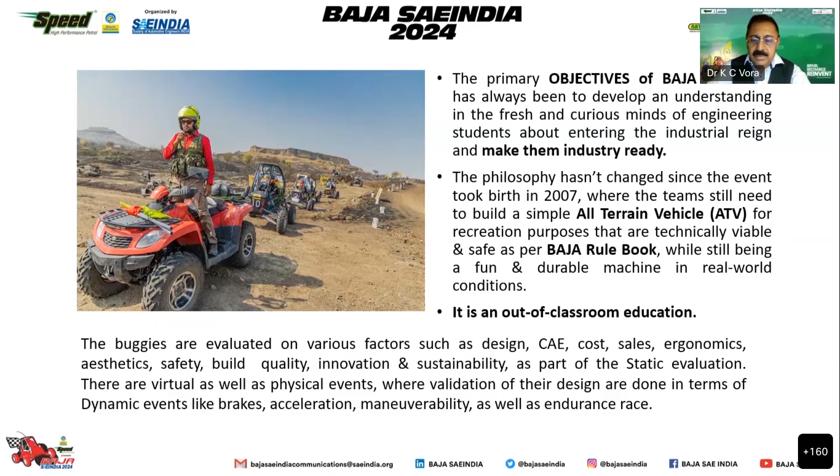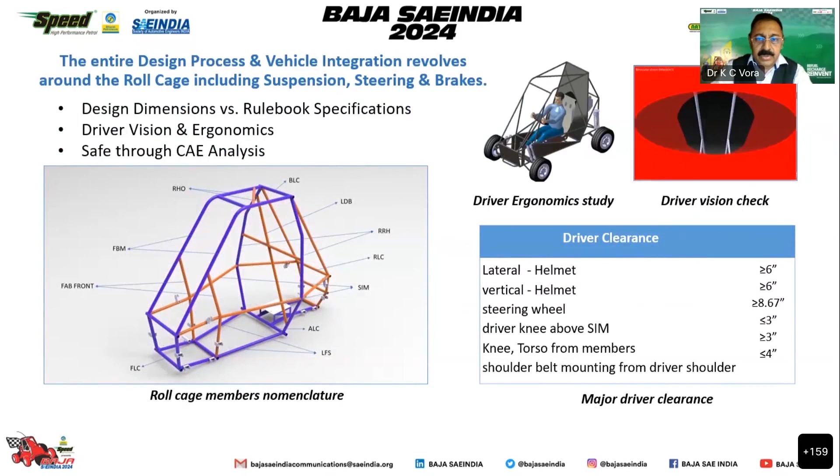Everything is designed revolved around the roll cage, which makes the driver safe, and other safety aspects are a 5-point seat belt, 2 kill switches, 2 fire extinguishers, and the entire kit which the driver has to wear, and so on. Also a detailed CAE analysis is done to ensure that the roll cage is 100% safe and the factor of safety is good enough.

The event, as many people have explained to you, is divided into 3 parts: preliminary, virtual, and the physical event. And there is also an HR meet.

Now I'll talk about hydrogen. Hydrogen is one of the lightest elements in nature and it is renewable. Hydrogen is a clean fuel with the highest energy content in terms of mass, and it can be used for power generation and also as a fuel in automobiles. Hydrogen has been used as a fuel in spacecrafts. It is possible to use hydrogen directly in an IC engine as a fuel independently or mixed with diesel or CNG. Also, it can be used in a fuel cell to directly produce electricity.

When we use it in an IC engine, the chemical energy of hydrogen is converted into mechanical energy, which is given to the wheel. And if we use a fuel cell, then the chemical energy is directly converted into electrical energy.

So when hydrogen burns, what we get is water. But if the hydrogen burning temperatures are high, then NOx is a byproduct. So it is therefore not only an efficient energy carrier, but a clean and environment-friendly fuel as well.

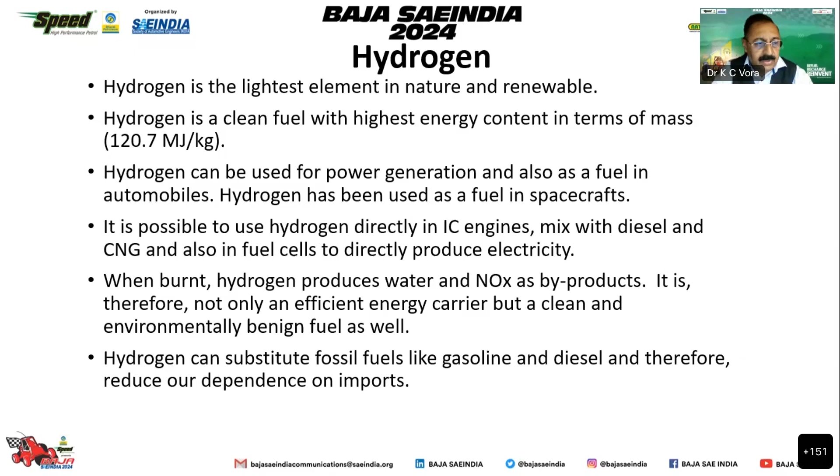Hydrogen can substitute fossil fuels like gasoline and diesel, and therefore reduce our dependence on imports of crude petroleum. So worldwide, whether it is Europe, USA, or India, we don't want to be dependent on import of crude petroleum, and hence everyone is working to find an alternate fuel, whether it is CNG, LPG, biodiesel, ethanol, methanol, electric mobility, or hydrogen.

So recently, our Prime Minister has committed that India will become energy independent by 2047. That means we will stop buying crude petroleum by 2047, and we will achieve net zero, meaning the carbon dioxide emissions will be zero by 2070.

And for that, we recognize the critical role of green hydrogen. When I say green hydrogen, I mean anything which is produced in a sustainable way, like using solar energy, wind energy, hydel energy, or nuclear energy.

So India, with its vast renewable energy sources, also has the opportunity to produce green hydrogen for the world. We can even export green hydrogen. We are very much blessed with good wind and good sunlight, and hence wind energy and solar energy can be used.

The Ministry of New and Renewable Energy, MNRE, is the nodal agency to drive the hydrogen program in India. There was a committee formed in 2005, and then another committee was formed in 2013, and they came out with a lot of recommendations.

But the final National Green Hydrogen Mission was launched just 3 months ago in January 2023. This green hydrogen mission aims to provide a comprehensive action plan for establishing a green hydrogen ecosystem and catalyzing a systematic response to the opportunities and challenges of this sunrise sector. So MNRE will be responsible for overall coordination and implementation of the mission. You can just Google National Green Hydrogen Mission and you will get this document.

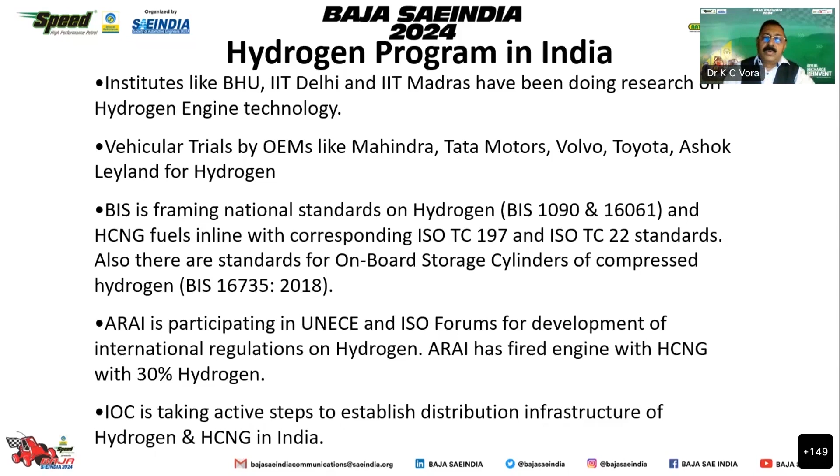BIS has also come out with various standards related to the fuel and the cylinders. ARAI has also done a series of work, and they have fired an engine with HCNG, that means 70% CNG and 30% hydrogen. Indian Oil Corporation and Bharat Petroleum are taking active steps to establish distribution infrastructure of hydrogen and HCNG in India.

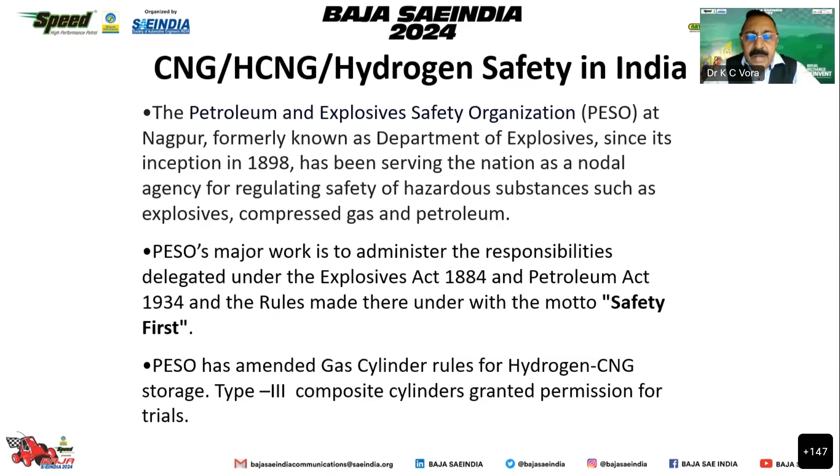There is something called PESO, Petroleum and Explosive Safety Organization. They have been working from Nagpur, and earlier it was known as Department of Explosives, and it is under their purview to ensure safety in the use of fuel. They have amended gas cylinder rules for hydrogen and CNG storage, and type 3 composite cylinders are granted permission for trial.

Basically cylinders are of 4 types: all steel called CNG1, fiberglass hoop wrap steel liner called CNG2, all carbon fiber wrap cylinder called CNG3, or fiberglass carbon full wrap cylinder called CNG4. CNG1 and CNG2 can be used for CNG, and CNG3 and CNG4 can be used for hydrogen as a fuel.

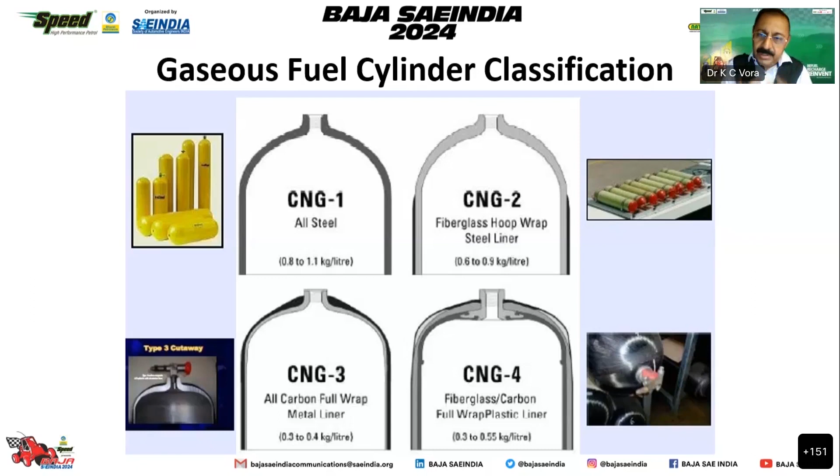Hydrogen has a property to embrittle the metal, and hence we cannot use stainless steel when we have hydrogen as fuel. But up to 18% hydrogen in CNG, one can continue using steel. That means when we want to do a transition from CNG to HCNG and HCNG to hydrogen, we can continue with the same CNG engine with 18% hydrogen. And that's what we plan to do.

There are various properties of the fuel which we need to understand: hydrogen independently, hydrogen CNG with 5% hydrogen, pure CNG that is methane CH4, and gasoline. You would see in the third line, minimum energy for ignition is only 0.02 millijoule for hydrogen compared to 0.2 to 0.3 for HCNG, CNG, and gasoline. So hydrogen is very explosive.

It can ignite very fast, and hence we need to be very, very careful. Let's look at the octane number. Generally a gasoline octane number is around 87-94. CNG octane number is higher than 100, between 100 and 110. If you add hydrogen in CNG, it can be anything between 100 to 130, and a pure hydrogen octane number would be more than 130.

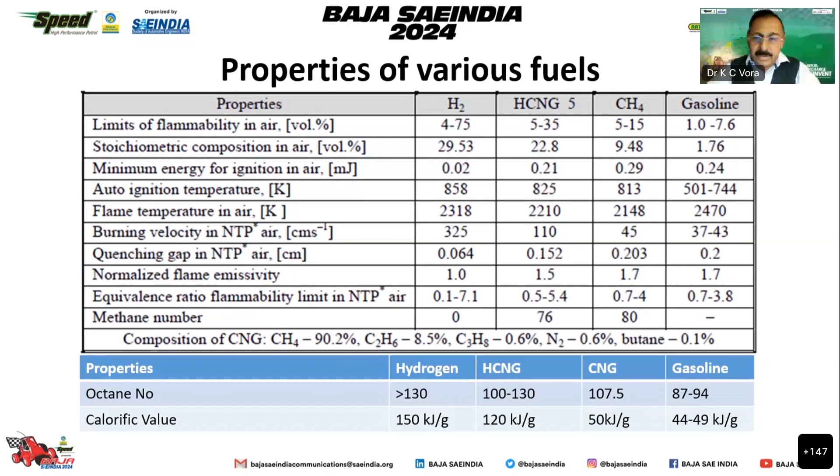So we can use a higher compression ratio if we are using dedicated fuel. Similarly, calorific value also, as you move from gasoline to CNG, CNG to HCNG, and HCNG to hydrogen, it increases. So between hydrogen and gasoline, the calorific value increases 3 times.

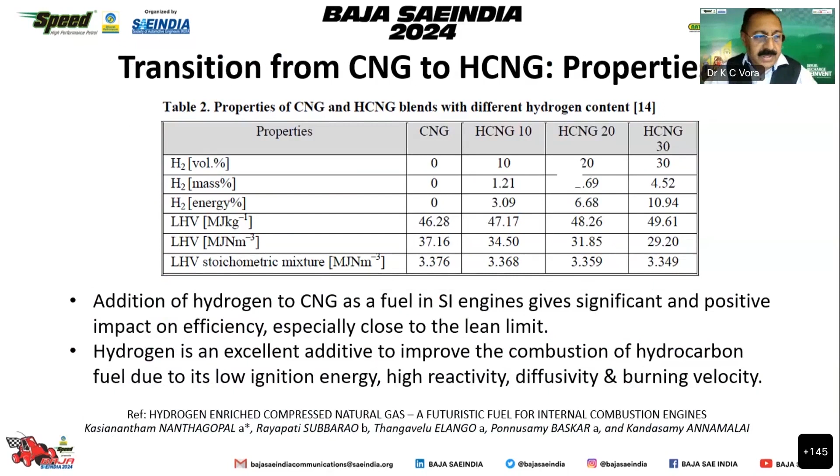A lot of experiments have been done to test CNG with 0% hydrogen, 10% hydrogen, 20% hydrogen, and 30% hydrogen blended in the fuel, and there has been very good success in terms of testing. If you use more than 30%, you need to use a spark arrestor in the front and rear. So we need to be careful, and that's how we will create awareness as we move from CNG to HCNG and HCNG to hydrogen.

So how do we do this transition from CNG to hydrogen? CNG was introduced in Delhi first in April 2001, and all transport vehicles, auto rickshaws, taxis, and buses were converted to CNG compulsorily through Supreme Court notification, and that considerably reduced emission levels in Delhi.

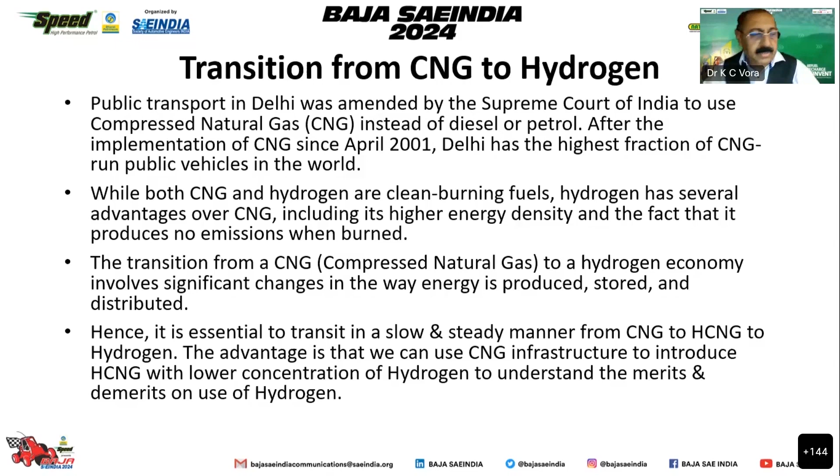Recently, HCNG was introduced with 18% hydrogen. It is at the experimental stage with the help of Indian Oil Corporation. That is the next step, to start using some portion of hydrogen, which will increase the octane number and increase the calorific value.

Looking at the technology, we started with conventional vehicle technology and kept increasing thermal efficiency, mechanical efficiency, and volumetric efficiency of the engine. Then we improved conventional fuel, reducing sulfur content and lead. Lead was totally abolished so we could use catalytic converters. Phosphorus in the oil was also reduced, and we started using synthetic oil. Then came alternate fuels like CNG, LPG, ethanol, methanol, and biodiesel.

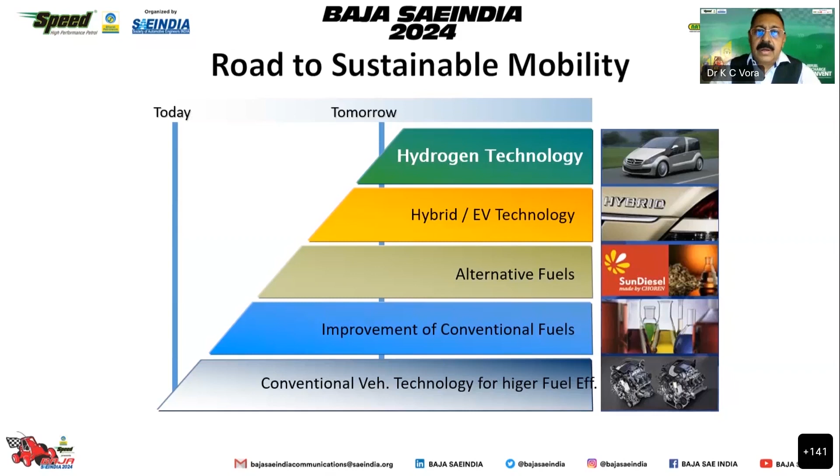Then we started electric vehicle technology through FAME, and hybrid are yet to come. But the future for tomorrow is hydrogen, either as a fuel or in the form of fuel cells. With this background of hydrogen, HCNG, and CNG and its transition, I will now talk about hBAJA.

The challenge is that we must initially use CNG, then in subsequent years use HCNG with 18% hydrogen, and slowly ramp up the percentage of hydrogen to 100% as and when the country is ready with mass production of hydrogen. The vehicle can be any type: 2-wheel drive, 4-wheel drive, all-wheel drive, and the hydrogen engine necessarily needs to be an IC engine. So that would be a transition from mBAJA to hBAJA.

Similarly, autonomous vehicle BAJA would be a transition from electric BAJA. So electric BAJA will transition to autonomous BAJA, and mechanical BAJA will transition to hydrogen BAJA. Yes, the engines are different. I will talk about the engine.

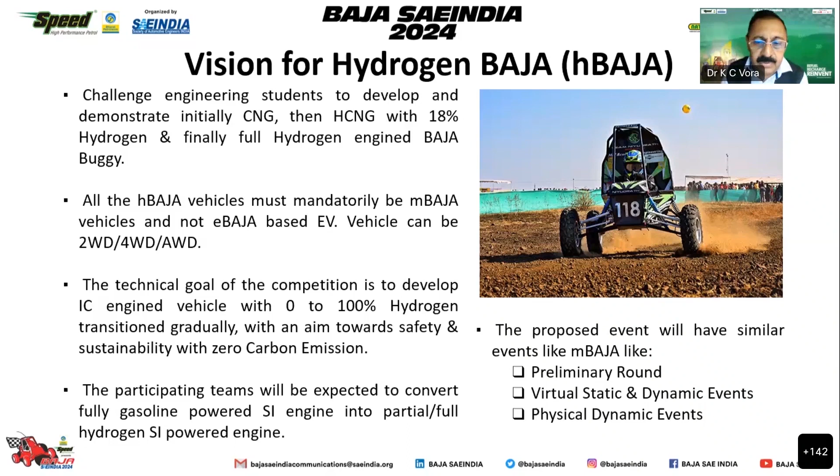As we ramp up the hydrogen percentage as we move forward, we will require a powertrain, an engine, and a transmission. We'll have to understand whether we want a normal gearbox or a CVT, what the ratio will be, and what tire size depending on maximum speed. As of today, the maximum speed of the BAJA buggy is 60 km/h. We also need acceleration to win the race, and gradability to hill climb the event.

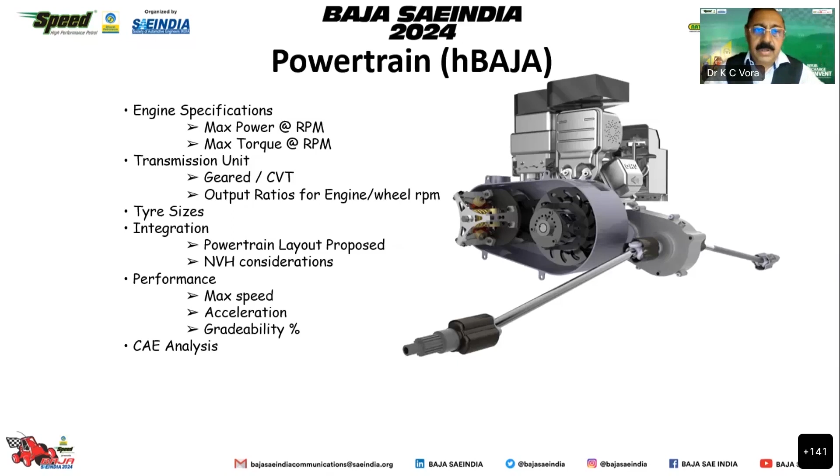Finally, I would like to declare that for hBAJA, Greaves has agreed to give us an engine at a very low, nominal cost. It is a single cylinder, 4-stroke, naturally aspirated, water-cooled engine, meaning we'll require a radiator, and it is an electronically controlled CNG injection bi-fuel engine. So it will have a petrol tank and a CNG tank.

When we are running in competition, we will be using CNG, but when not in competition, we are allowed to use gasoline. So gasoline and CNG will both be available at the site. You will not be using your own fuel; BPCL will be supplying equal quality fuel to all of you.

This is a 396 cc engine, around 400 cc, similar to Briggs and Stratton, with a bore of 86 and 68. In a Briggs and Stratton engine, the compression ratio is 8; here the compression ratio is 9.5. It's a 10 horsepower engine, same as Briggs and Stratton, but the torque is slightly higher at 22.5 Newton meter. The total dry weight of the engine is 47 kg, so approximately 50 kg with lubricating oil.

15W50 oil is used, and the cooling system will have 40% ethylene glycol and 60% water. The fuel tank capacity, meaning the petrol carrying capacity, is 3.8 liters.

For BAJA SAEINDIA 2024, we will be using 100% CNG. For BAJA SAEINDIA 2025, we will be using CNG with 18% hydrogen, that is HCNG. And for BAJA SAEINDIA 2026, we will increase the hydrogen content in HCNG as and when the country is ready to supply similar fuel.

So I would like to say that there are a lot of advantages of using CNG: its octane number is higher, it has good lean combustion, abundant availability in India, and there is no sulfur content and no lead.

It emits less carbon dioxide, less carbon monoxide and hydrocarbon, maybe equivalent or slightly higher NOx, and it can be used with gasoline or diesel. Some of the issues we need to tackle: it has a lower volumetric efficiency, leading to a power loss of around 10 to 20%.

If you are using bi-fuel, meaning sometimes petrol and sometimes CNG, we have to manage with a 9.5 compression ratio. If it is dedicated CNG, we can increase the compression ratio to 10 to compensate for the same power. But if we increase the compression ratio and still use gasoline, there would be detonation. Hence we need to use 9.5. We cannot increase the compression ratio if you're using bi-fuel.

CNG has to be stored in the vehicle somewhere above the engine. The engine would be in the rear, the cylinder would be in the rear, and also the petrol tank would be in the rear. We need a lot of infrastructure for supply of CNG. Luckily, BPCL has agreed to supply.

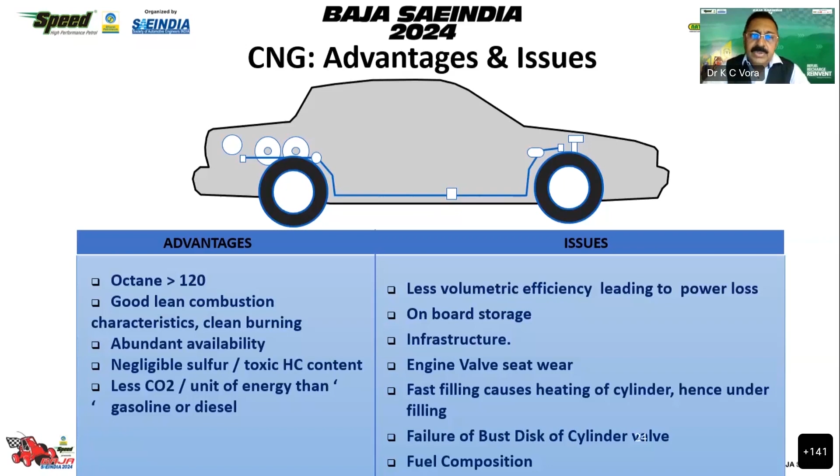So these are some of the advantages and issues, but we can sail through and use CNG in BAJA SAEINDIA 2024. Yes, you can do simulation using GT Power or Fire and Boost to find out how this vehicle would behave with 100% CNG or with CNG plus 5%, 10%, 18% hydrogen. Then you can do an experimental test and compare your data in terms of validation of the fuel test. That's all from my side.

Now, as far as the engine is concerned, the Briggs and Stratton, my colleague from Greaves, Dr. Kalimuddin, will be speaking in more detail about the use of this Greaves engine and its salient features. Thank you very much.

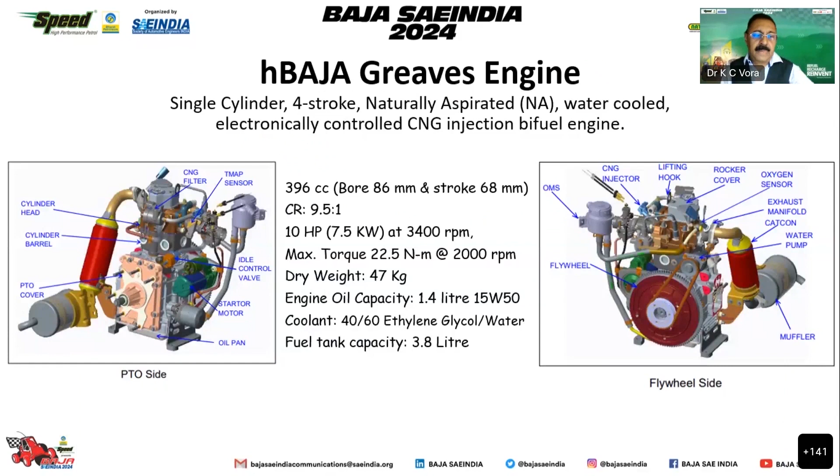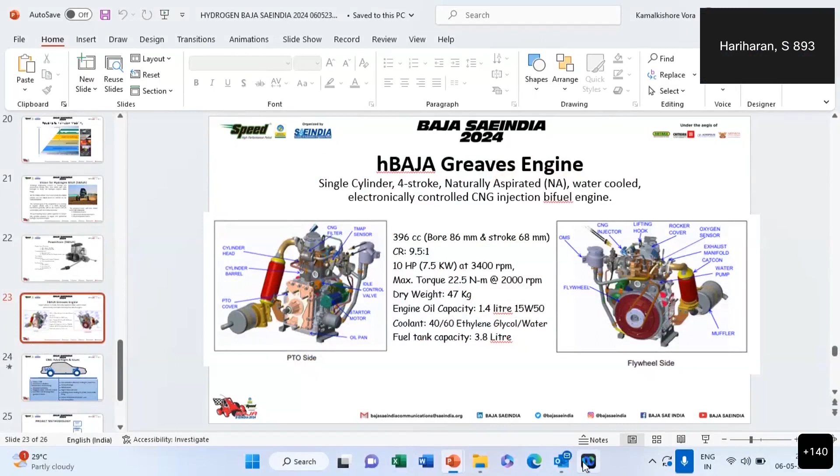Am I audible? Yes sir, yes sir, you're audible sir. Yeah. So I will unshare now, and you can introduce Dr. Kaleemudin, and we'll take all the questions together. Sure, sir.

Yes, hello. I'd now like to invite Dr. Kaleemudin Syed, the General Manager at Greaves Technology Center. He has over 25 years of experience in research and development. He has a PhD in mechanical engineering from NIT Warangal, an MTech from REC Warangal, and a BE Mechanical from Government College of Engineering, Aurangabad. He has filed a whopping 18 technical papers in various national and international journals, and has expertise on single and two-cylinder diesel, gasoline, alternate fuel, dual fuel engines, and dual fuel engine optimization for three-wheeler and small four-wheeler vehicle applications.

Over to you, sir. Yeah, I'm audible. Yes, Kalim. Yeah, just let me share my screen so that you can see it. Not yet. Yes, we can see now.

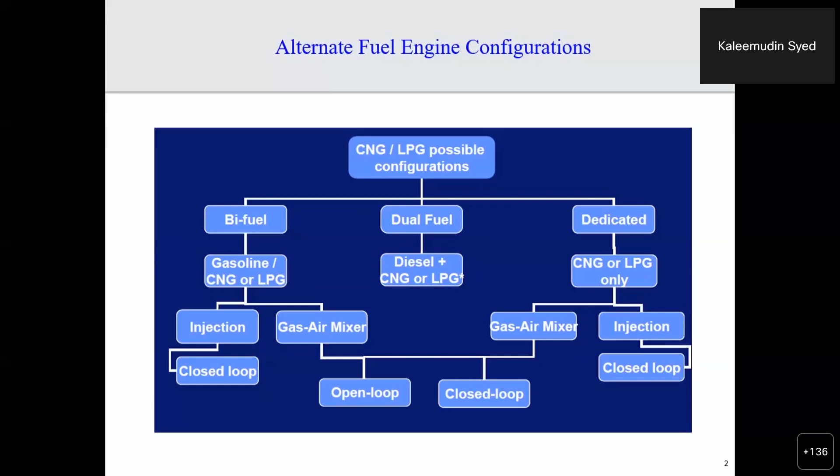Coming to the limitation of gas air application: it has poor cold startability, low engine output, air fuel ratio control not precise, not suitable for turbocharging, deceleration fuel cutoff not possible, wide production tolerances, and limitation on meeting proposed BS6 norms. These are the major challenges where we cannot use gas as a mixture for this application point of view on this engine.

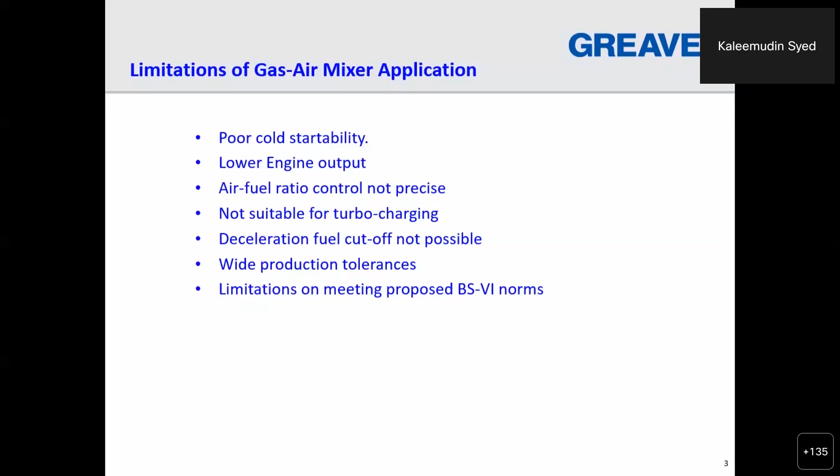Air fuel ratio control is one of the benefits. Then there's better catalyst warm up because it's a lean burn and exhaust temperature is high, so catalyst warm up happens earlier. Deceleration cutoff is very much possible because of injections, and it's suitable for turbocharging, though this single cylinder engine has no turbocharging or supercharging for this application. Narrow production tolerances can be achieved with the injection system, good transient behavior can be achieved on the vehicle, and there is high potential for meeting proposed BS4 to BS6 norms.

Now this engine has been upgraded to BS6. That's what we are going to offer. So nothing to worry about from the emission point of view.

The concern is poor startability in cold condition, engine misfire and backfire. Since this engine has a closed loop injection system, this phenomena may not occur. Catalyst overheating also may not occur because this engine is already tuned for lambda 1 unity. High exhaust temperature is a concern, but being a water cooled engine, this can be controlled very well. Then vehicle stalling and poor drivability can occur if the engine is air cooled, due to more heat losses. But the engine offered for this project is water cooled, so this concern is also eliminated.

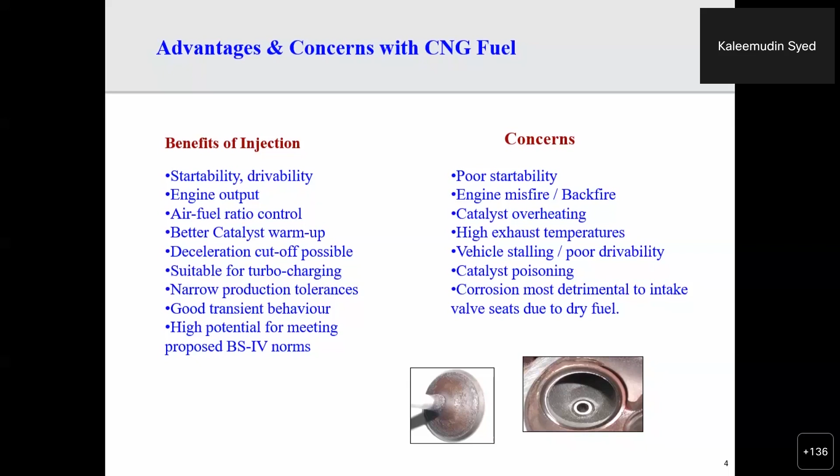Into the technical specification, as Dr. Vora has already stated, it's a 396 cc engine with port injection, having 7.25 kilowatt or 10 HP at 3600 to 3400 RPM. Maximum torque achievable is 24.5, but we are restricting it to 21 to 22 because of the limitation of the gearbox being used on the vehicle.

We have a power takeoff of spline type, so the gearbox to be matched for this vehicle will be easily available in the market for this spline crankshaft, since most single cylinder engines have crankshaft as power takeoff. So any gearbox can be easily matched for this engine. Also, the limitation is 60 kmph, so this engine is very reasonable for packaging point of view and for the speed point of view.

Coming to the size, it's very small height, almost 449 by 358, with 485 being the maximum height, which is also very less. Weight is approximately 46 kg manifold to manifold. Some increment of weight will happen because of the exhaust system and silencers based on the vehicle application.

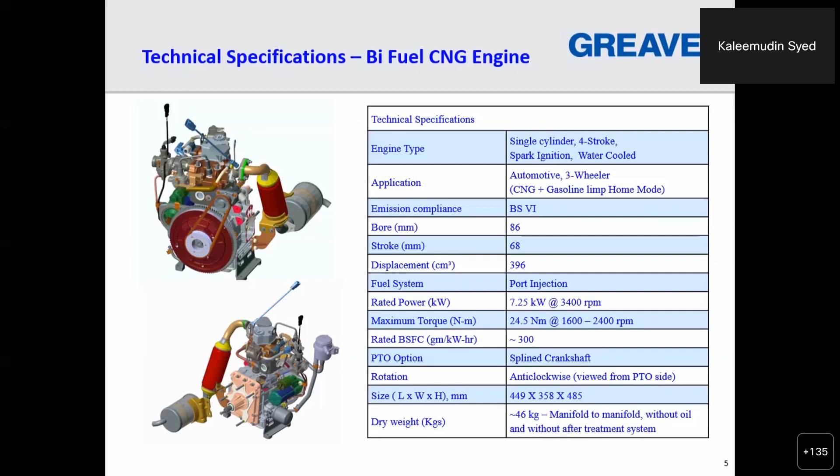Coming to the technical features of the engine, it is a gas injection system, that means CNG. Then for gasoline, it is carburetor driven because it is in limp home mode. Then electronically controlled ignition and fuel, drive by wire, electronic governing system, deceleration, fuel cutoff, stoichiometric combustion.

It is already optimized, so not much effort is needed for optimization on the vehicle packaging or on the engine steady state. BS6 emission compliant with OBD2 norms also.

Then free acceleration, fast acceleration response, single cylinder water cooled engine, fueled with CNG as well as gasoline as limp home. ECU controlled port CNG injection plus carburation for gasoline, closed loop breather system.

So there will not be any oil seepages from the breathers and other things. Usually small engines have this phenomenon of leaking oil, but this oil leaking will not be there on this engine.

Then flywheel having an integrated alternator. Suppose you need some current for the vehicle lighting and other things, that can also be taken from this engine. Then cast iron cylinder head and barrel.

In case this project is taken up for hydrogen assessment, it can easily be done because wear and tear and sustainability of the material for hydrogen is very good for cast iron and other applications.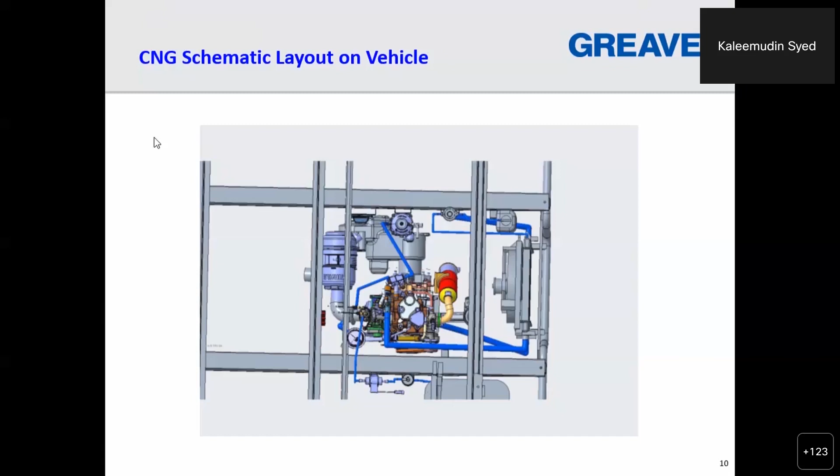The radiator is very small and can be packaged in front or back side of the engine also. I think the heat capacity is almost 5,000 to 6,000 kilojoules, so it's not a problem. This engine radiator is easily packageable on the BAJA vehicle.

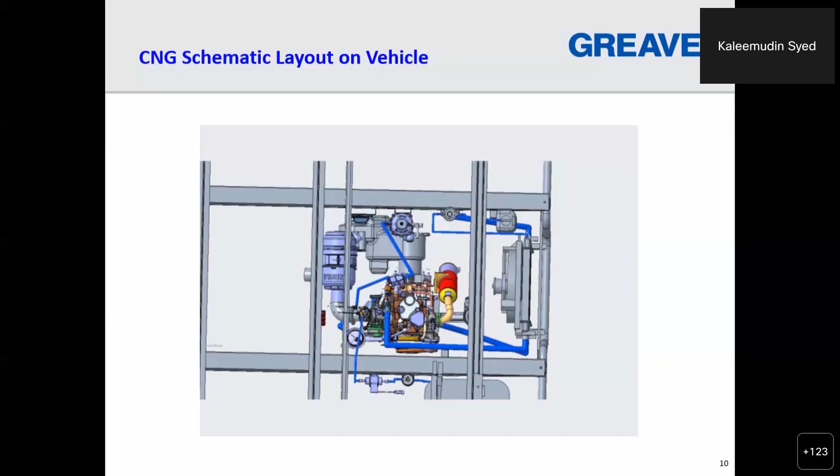Schematic layout shows what is to be mounted on the vehicle and what is to be mounted on the engine. So the engine is having all the systems as such.

From the vehicle point of view, you have to fix the CNG tank, then regulator, then ECU, then air filter, these are to be mounted on the vehicle. Battery has to be on the vehicle. Then CNG filters and other things have to be mounted on the vehicle.

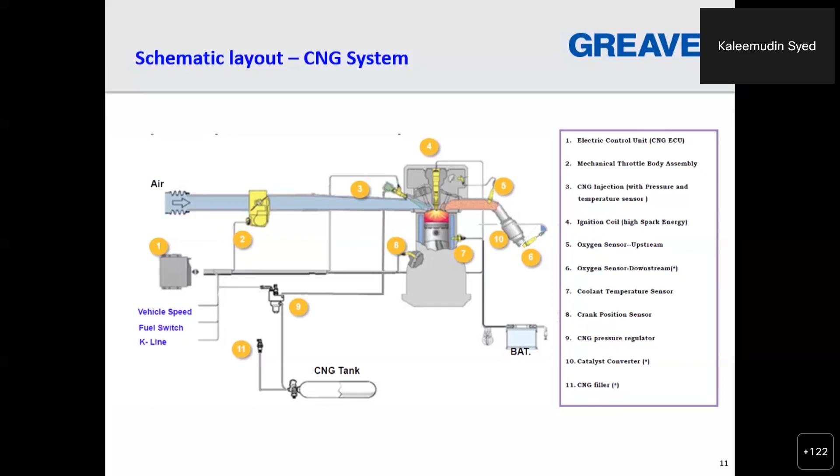So the major challenge for the students will be the CNG tank fitment. Appropriate tank selection from the vehicle size point of view is necessary, that has to be studied carefully. For the other packaging and accessories, we will support you for that.

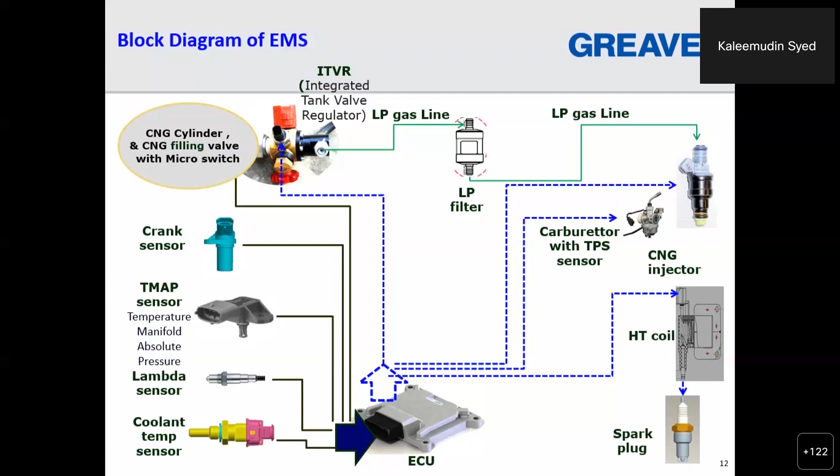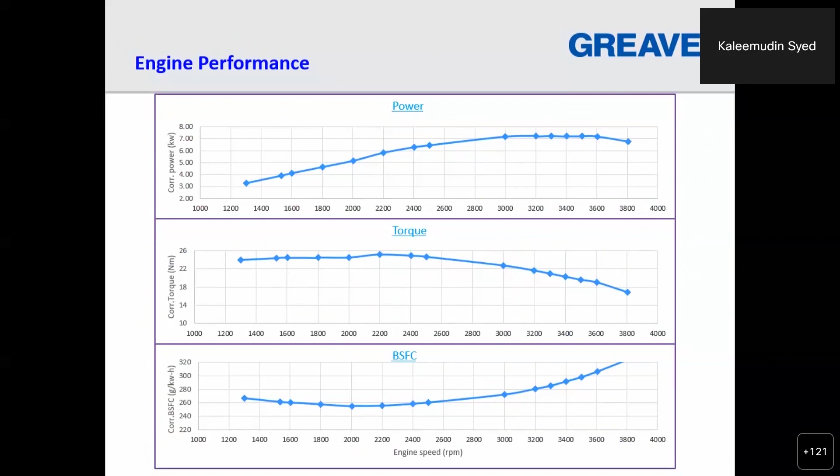Looking at the performance graph, this is almost a 10 HP engine, and you can see the torque value. It is on total flat torque, so more suitable for all-terrain vehicle application where drivability is a must in different terrain testing of the vehicle.

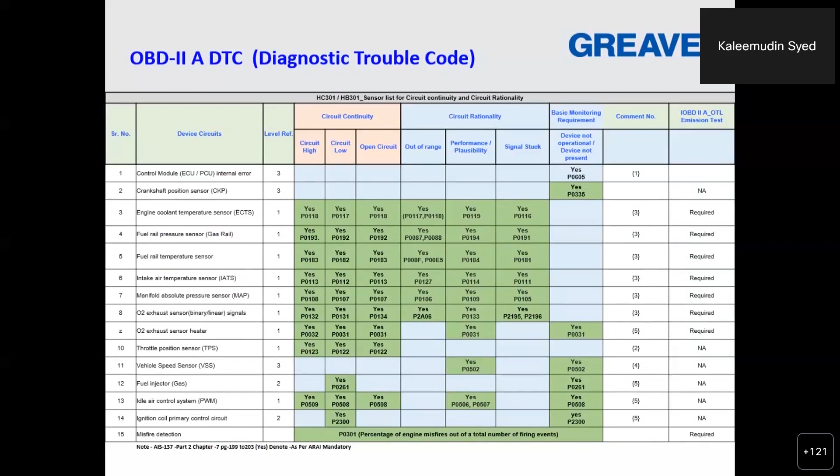Coming to the onboard diagnostic, if you want to verify and loop diagnostics on the vehicle, that provision is also there in the control unit. So this can be demonstrated and verified for this all-terrain vehicle, how it behaves with this diagnostic when tested on ATV vehicles.

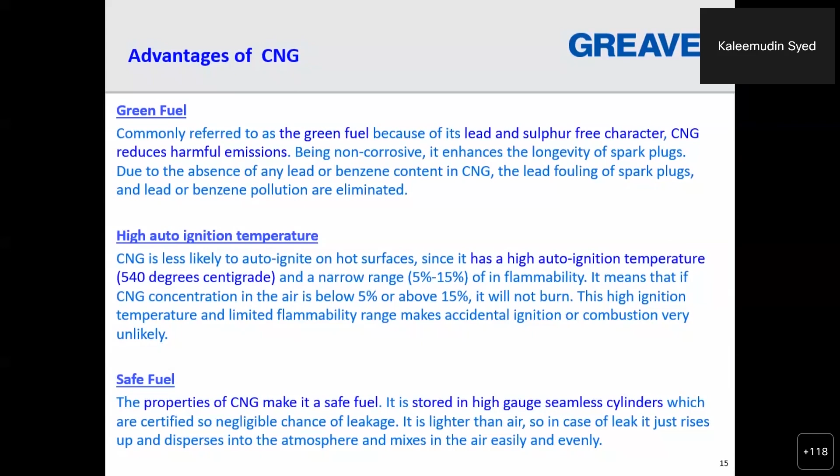Coming to advantages, I think Vora sir has already covered this. It's the green fuel, low sulfur, sulfur-free, lead-free, and CNG reduces harmful emissions. It has a very high auto ignition temperature, more than 540 degrees centigrade, and it is a very safe fuel. It is stored in a tank that is tested for all safety points of view, seamless cylinders. So nothing to worry about testing this on an all-terrain vehicle.

Coming to the dual facility, a CNG vehicle can run both on CNG as well as gasoline or petrol. Then increased life of oil, as low ash content oil is being used, so lubrication oil life is better in CNG engines compared to diesel and other gasoline engine applications. And low cost of operations. These are the advantages of CNG.

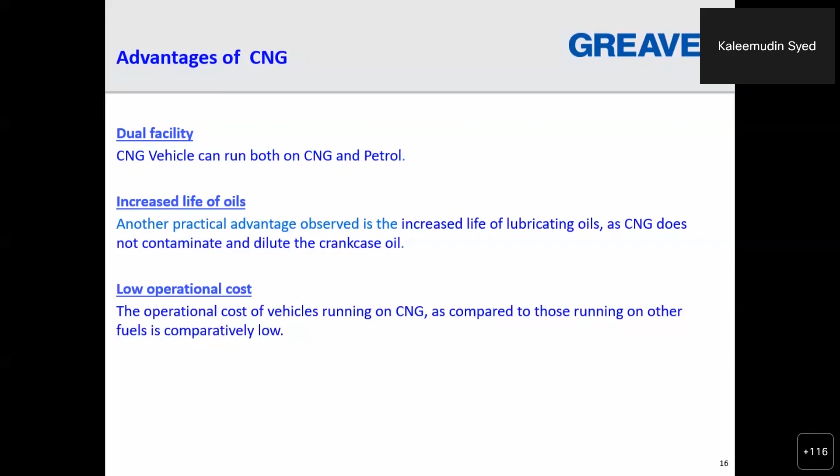So I think this much only the presentation, sir, from my side.

I have a question for you, Dr. Kaleemudin. Excellent presentation, I think all the students here would understand everything about the engine. So is this the same as the Alpha engine of Mahindra? Does Mahindra Alpha CNG use the same engine?

Yes sir, across the OEMs, overall in India, except TVS and Bajaj Auto who are not taking it, all other vehicles are using the same engine. This vehicle, sir, whatever vehicles are plying on the road with BS6, with our engine, is with this engine only. So Mahindra, Atul Auto, even Piaggio? No, Piaggio is not using it. Atul Auto vehicle is using it, Taxi is using it, and then JSA Auto is using it. JSA, there are a lot of vehicles in Pune, I have seen.

Okay, yeah, so students, if you want to see this engine, you can see it in Mahindra Alpha or whatever sir said, those 3-4 vehicles, wherever they are in India and wherever you are located, you can have a view of that engine. And finally, this engine will be supplied from Greaves to all of you for hBAJA. Regarding mBAJA, we have not taken any decision.

Sir, one more thing I want to tell the students: they are welcome to visit Greaves anytime, just to intimate us, and we can show them the vehicle also, how it has been packaged. And in case any support or assistance is needed towards the gearbox side, that can also be taught to them.